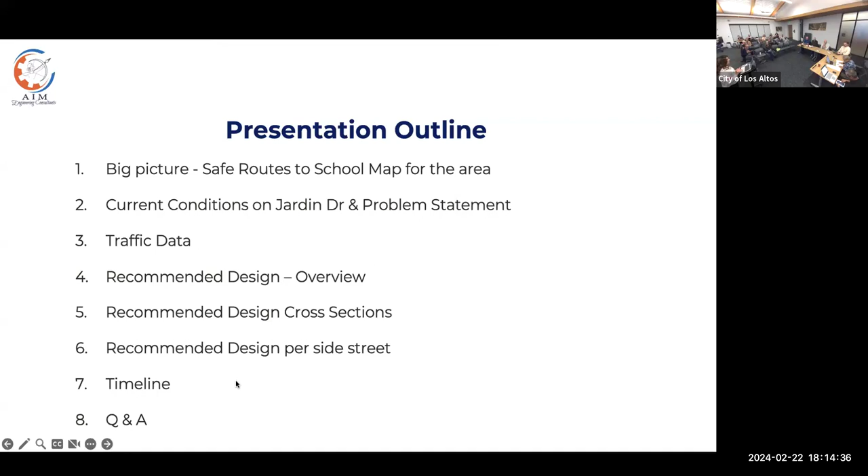Then I would like to go really slow after the high-level overview, where we will look at each side street, starting from one end of Jardin to the other, and look at it in great detail. Lastly, a quick timeline and a question and answer session.

Okay, this is the Safe Routes to School plan for the area. There's a copy of it behind me. It's been on our website. The focus of this slide is to show the recommended routes for connection to the different schools around this area, which includes Santa Rita Elementary School, Egan Junior High, Bullis Charter, Los Altos High School in the middle, and Almond Elementary on the southeastern side. This is an important slide for us to take a minute and look at how Jardin Drive fits into the big picture of the region, as it connects to El Camino Real and the other side streets that lead throughout the city, including North San Antonio, El Monte, and all the other collector streets in the region.

With that, I'd like to mention that the implementation of the Safe Routes to School plans is one of the City Council's highest priorities. The reason it's such a high priority is that the recommended Safe Routes to School path goal is to make it easier and safer for pedestrians, students, and families to navigate the city streets and safely move around and make it to their destination, ideally by foot or bicycle, and third by vehicle, and later on as the city grows, through the use of transit and other modes of transportation. Staff understands this is the number one priority for City Council.

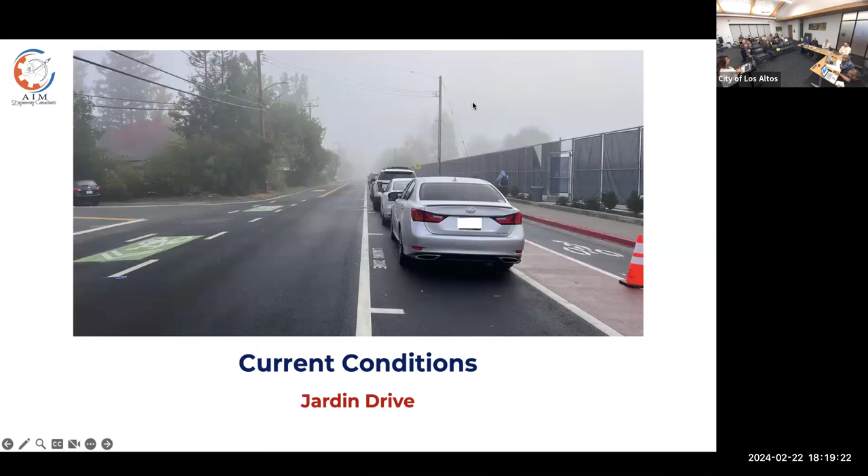This is our current condition on Jardin Drive. We're all aware of it. This is what has brought feedback from the community, from the students, from the high school, from the police department as well, in terms of what they're seeing regarding pedestrian and vehicle behavior and navigation of this corridor.

Simply put, our problem statement is that the current street configuration of Jardin Drive has created the following problems, at least that we've verified. We have reports of it, and we've heard from the community in the previous meeting.

What we're seeing right now with the current condition is unsafe pedestrian behavior, with gaps in the sidewalk infrastructure or facilities. Part of the street has a sidewalk, part of it is unmarked. The residents and students, upon arrival or departure, are navigating kind of freestyle, and their unsafe behaviors are putting them at risk with vehicles and bicyclists. It's not just the students we notice having unsafe behaviors.

Because the facilities aren't built out and the edge line on the north side of Jardin basically just ends where the pavement ends, pedestrians have no choice, if they want to be on that side, but to get onto the pavement, which is a travel lane, until they reach a point where they can connect. So there's a sidewalk gap and a connection gap, resulting in the unsafe pedestrian behavior we're currently seeing.

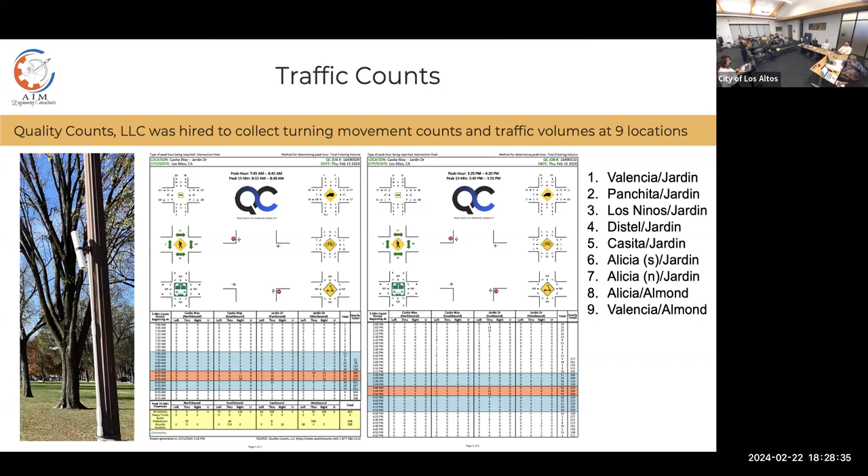We don't have the time and resources to immediately implement that to all those blue segments you saw on our region map. So with that, I will move on to the recommended design. This is very high level, I will go into small sections one by one.

So with this, we hope to get PD's enforcement a little bit more, because now it'll have the proper signage. So that's one add-on you'll see.

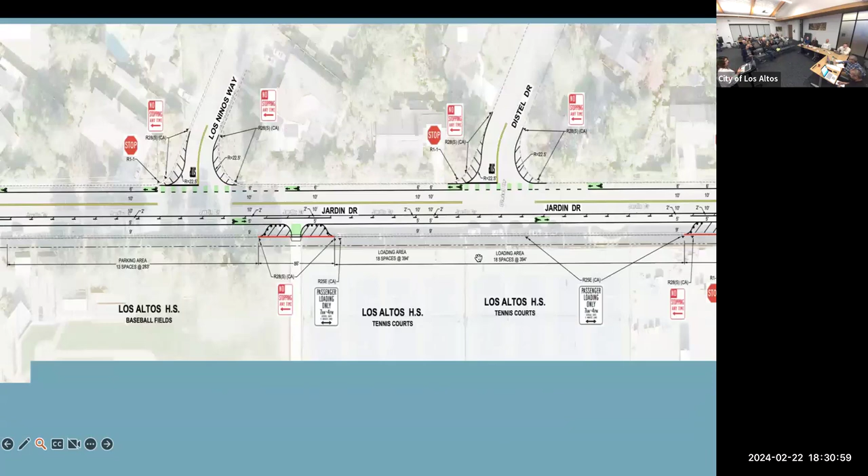One major change or new operational addition you haven't seen so far is a turning restriction on Casita during the morning and afternoon drop-offs. What we were seeing is a lot of pedestrian and bicyclist conflict with vehicles here. A lot of vehicles are leaving Casita and making a turn, and there were so many near hit misses in the videos we watched - we almost couldn't watch it, it was so uncomfortable, such close calls.

I wanted to later share a personal story about cases where it's not near hit misses - what's happened near schools at other agencies and how it was handled. I'd like for us to be aware that if we don't restrict turning movements in this direction, we have a lot of data of near hit misses. It won't just be data, it may actually happen. So that was the overall summary.

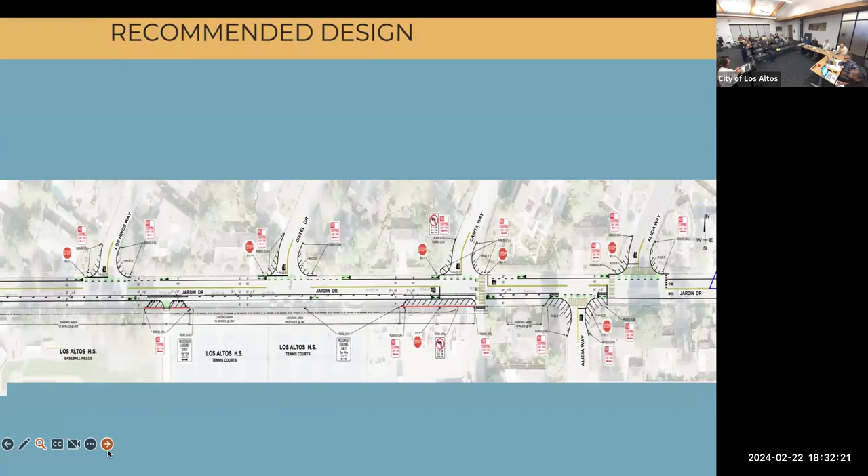Overall, the street section I think is as such: the sidewalk is remaining. The parking we proposed last time to be a 7-foot parking or loading zone, we've added another 2 feet to accommodate the door swing and any movement from the driver. So the parking zone is now 9 feet wide, a 5-foot bike lane, followed by a 2-foot buffer, the same typical 10-foot travel lane. We've made the north side bike lane a 6-foot bike lane, a foot bigger than the standard minimum of 5 foot.

We believe the north side needs the space, and there is a lot of activity on the north side from what we see, and there is currently no sidewalk. So having the bike lane as a 6-foot bike lane is the proposed recommendation.

This section you haven't seen before - at the 2 points where students are entering the school, we wanted to limit parking before and after that entrance point. That way a cyclist, a student on a bike in the bike lane, could make that turn onto the campus without having to compete with vehicles parking in front of them or behind them by at least 20 feet.

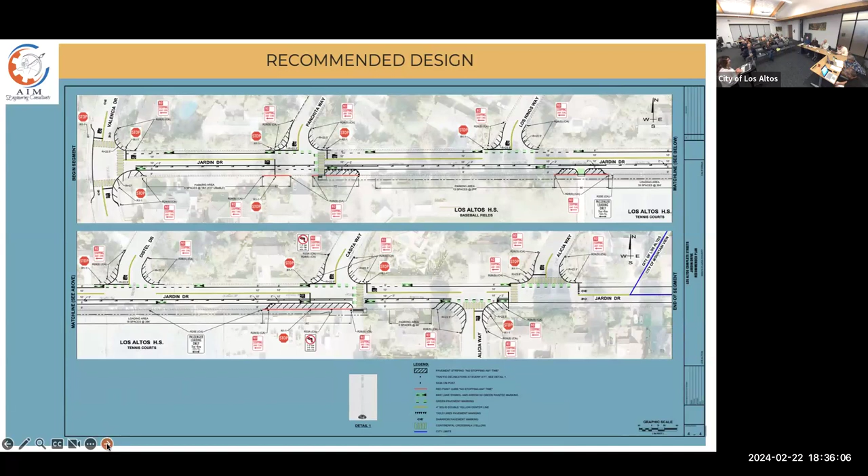Okay, so I will now break down this overall plan by going through Valencia and Panchita first, and I'll continue that for all of the streets till we get to Alicia. I hope you could see this.

So on Valencia, we had discussed hatching over here for a space for the pedestrians when they cross. We went out and basically it's simple line work right now, and that does the job, so we don't need to add more hatching here. We did hear from the residents here that they would rather have less striping in this area, so this was one that we could reduce the striping, and we did. And the ladder crosswalk, high visibility crosswalk, has been brought up before.

I do want to make a point that the distance from this intersection, this crosswalk, to the opening of the school's property, which is a baseball field and an access point to the school, falls within the distance that requires all crosswalks to be yellow high visibility crosswalks.

Thank you, appreciate it. The distance to the baseball field, regardless, even past the baseball field, it falls within any of the access points to the school.

As a city, and throughout town, and in all safe routes to school plans, high visibility crosswalks are a safety addition to make it safer for people to be seen as they're walking and crossing the street, especially in a city that is not very well lit. It's an important improvement to make as much as possible, even beyond safe routes to school paths. Even other white crosswalks should be ladder and high visibility.

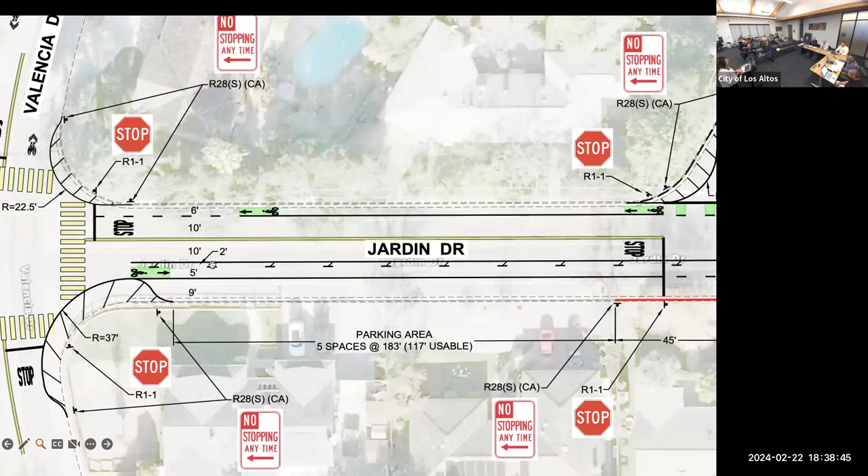The little bulb outs are already there, so we're just showing the hatching. The homes here, the parking remains, so there's about 5 parking spaces in this segment. And the change you'll see is a 9-foot parking lane, 5-foot bike lane, 2-foot buffer, 2 10-foot lanes, and a 6-foot bike lane on the north side. This section remains the entire stint, from Valencia to Alicia. The street section and striping doesn't change.

We hope that having a consistent design like this will be predictable, easy to understand, and there's not too many changes for the users.

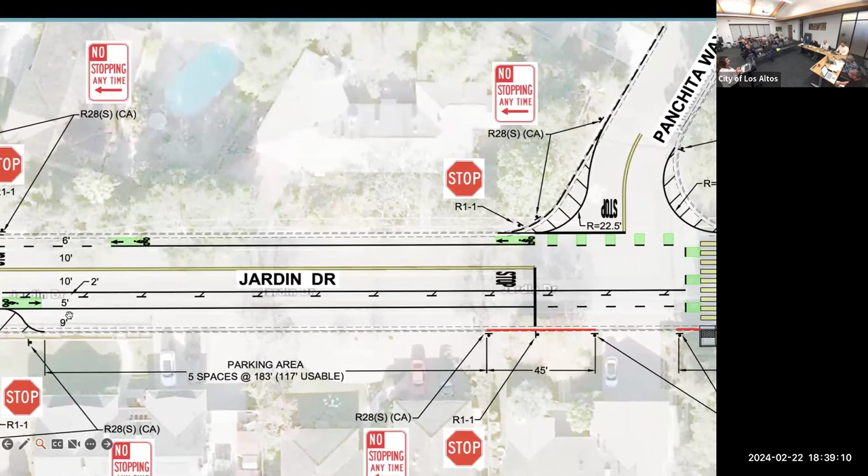Something new I want to point out here is that this stop control at Panchita used to be a one-way stop out of Panchita, and then these were added in a previous project. Panchita, as you guys saw on the main citywide safe routes to school map, is one of the main corridors, as well as a casita into Jardin. So there's probably a reason when this got installed it lines up to this ramp, and this crosswalk was added.

However, the stop, it's hard to see in the videos we saw, there's a lot of running the stops at this location. We looked at it further, studied the videos, went out to the field, and what's happening is that the stop sign itself is pretty far from the stop.

The neighborhood might know there's a stop here and they come to a stop, but what we're seeing is a mix. Some people were stopping, some were realizing it a little later. The only way to make this stop visible is by limiting parking, so it just has to become visible. We cannot move the stop into the street, it's an obstruction, and it introduces other safety concerns.

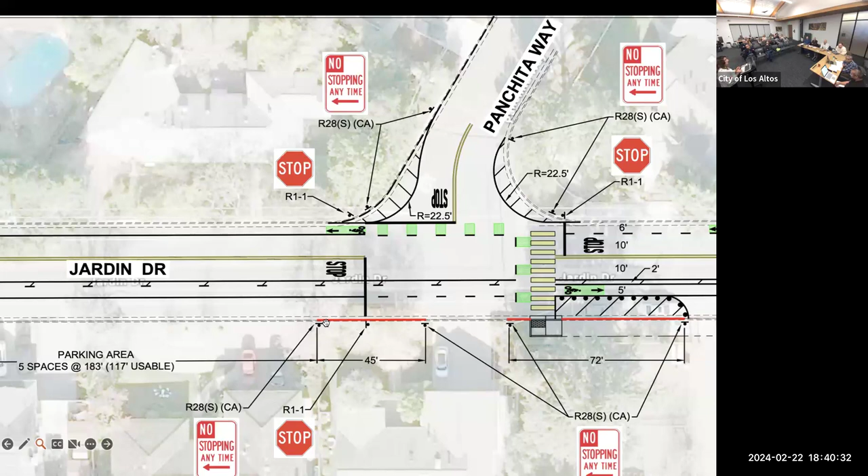At this point, about 20 feet to the right and left of this stop is a red curb being introduced. The ramp on Panchita is now being lined up better with the crosswalk, and the ramp here is getting improved so that pedestrians could hop on and get onto the sidewalk.

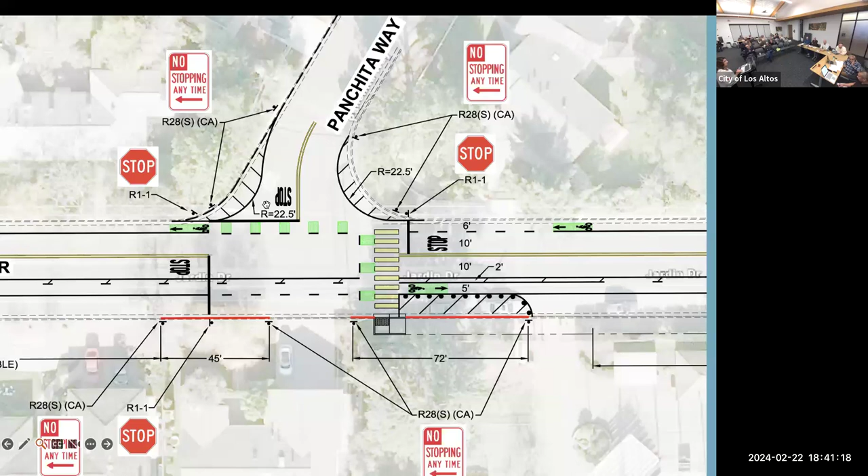Another feature that's new here, seeing the behavior has helped us understand what drivers, pedestrians, and bicyclists are doing. Since this is our parking area, we wanted vehicles to align themselves to the travel lane and not swerve in with the pedestrians and bicyclists trying to get a parking spot. If a vehicle is making a left turn, they have to align themselves and pass this zone before moving into parking. By then, the pedestrians would have crossed, and the bicyclists are watching out and aware of a vehicle moving in.

While I didn't show this here, the school is open and flexible and will continue opening the back gate on the baseball field. The high school vice principal mentioned that custodians open this gate at 6 a.m. and close it when they leave, so it is open and available for pedestrians and even bicyclists to enter.

This is available at least for the next couple of years. Long term, we didn't show a permanent ramp or driveway because the high school will take care of that as this is an access path. If it turns out this is a popular route, it could always stay open. So this design accommodates today's use and potential future needs.

The high school is looking into the plans for this driveway. Since we don't know about it, we didn't over-design this one, knowing the tennis courts are more popular and the east driveway is more popular.

Here we wanted to focus on getting drivers to line up to the travel lane when they make this turn. Luckily it's a controlled intersection, so you should go in order, and there's less conflict as we'll see as we move up Jardin.

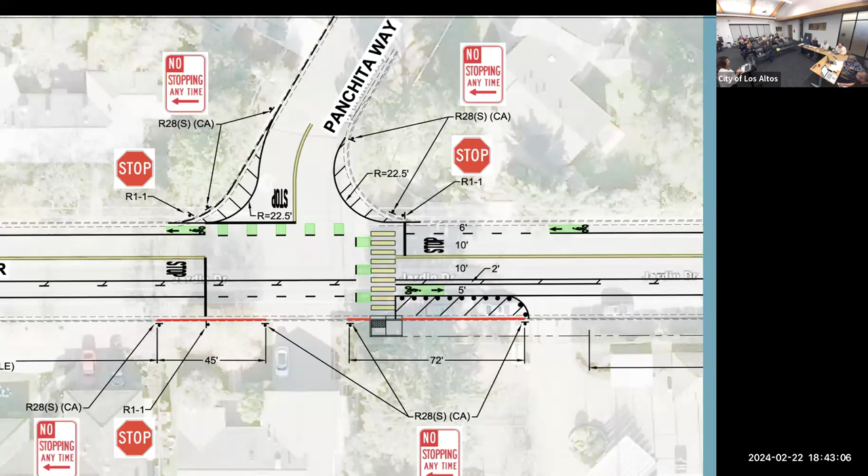On Panchita, again, just the no stopping anytime signs on the corners, red curb to make the stop sign more visible, and blocking vehicle parking up to this baseball field, with some bollards to really discourage vehicles from stopping here. It's pretty much make your turn, keep going - they have a better angle and better visibility looking straight down, and they're not in as much conflict as if they were allowed to park here. They may just swerve in and make this a drop-off zone, so the delineators are to really help drivers not try to illegally park and drop off.

This is - I'm sorry, let me go back. Okay, so that was Valencia to Panchita.

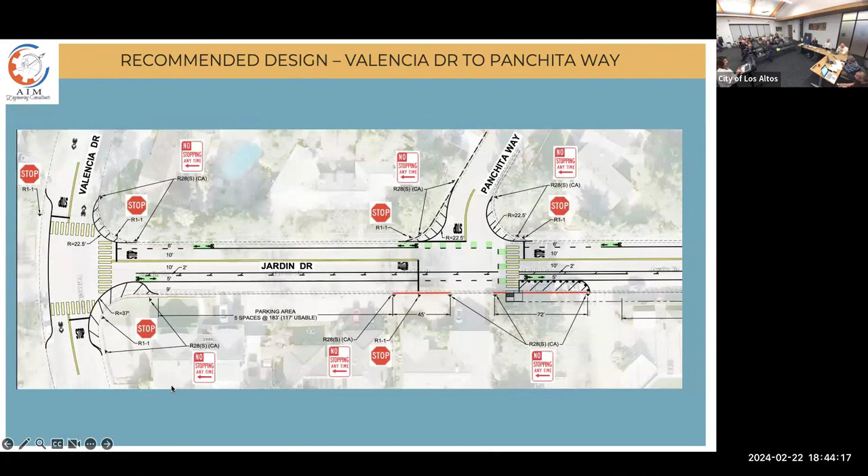Parking is available on this side of Jardin, and parking is available behind the baseball field. So now we're moving on to Panchita to Los Niños - basically that, did I say tennis court? Okay, I meant baseball.

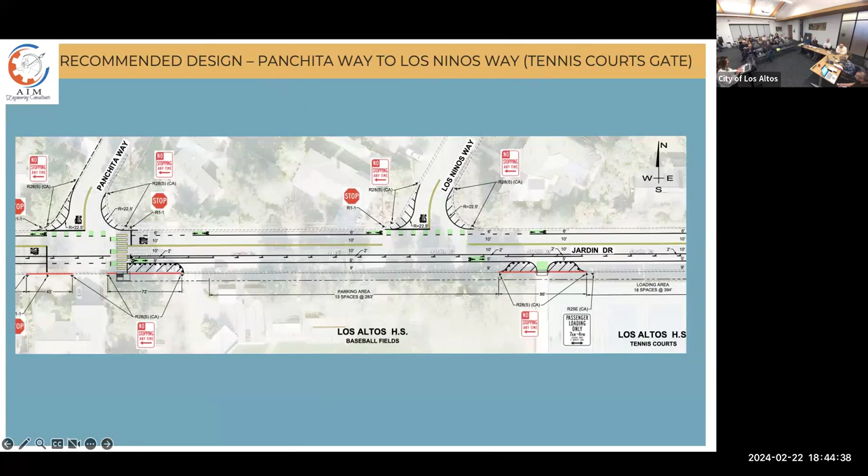Here, again, I'm showing that snippet from Panchita. In this section, as we mentioned, there's 9-foot parking, bike lane, a little buffer, 2 travel lanes, and a 6-foot bike lane on the north side. Parking is allowed here - we counted roughly, depending on whether we use the tick marks or let it be unmarked, how people park, maybe about 13 parking spots here. And I think we saw about plus or minus 8 or 9 off of Valencia.

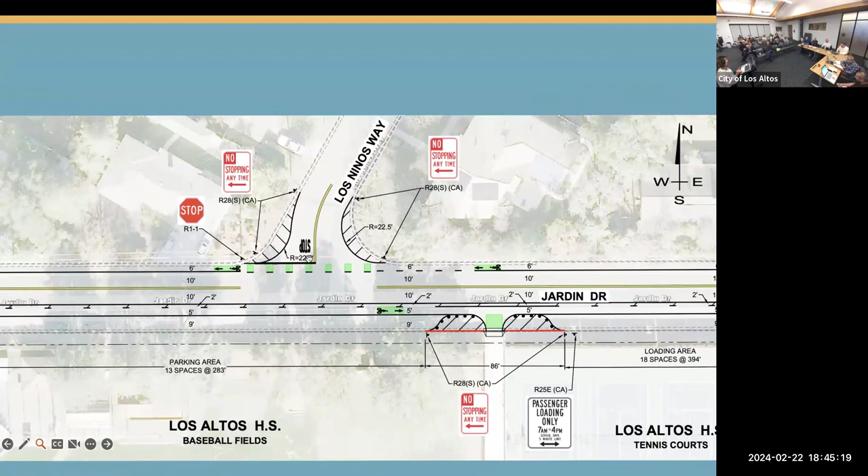At Los Niños, just the no stopping turns - we've talked about the center line of the side streets being scooched closer to the center, to the intersection, giving the driver better visibility to the right and left.

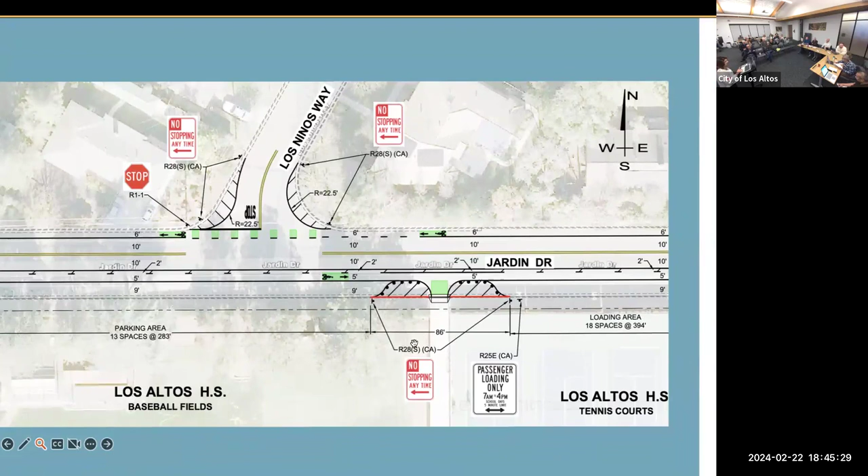Here is the tennis court entrance, and this basically marks where parking stops and the loading zone is available. We as staff went back and forth on this so many times with the high school, looking at the videos and looking at our traffic counts.

Just functionally, we've been out there, we're just seeing, well, what do people do? How are they using this area on the weekends? How does the evening hours look like?

Removing parking altogether on the street is going to create a lot of problems for the side street. It will also create more unsafe driver behavior if they have nowhere to stop to drop off.

So for that reason, we thought what would be the easiest way to enforce, for enforcement wise, and kind of just keeping a simplified understanding east and west.

We also looked at where are the kids coming from and where are they going from. Is the tennis courts more popular? Is the baseball field going to be more popular? We know based on traffic volumes that the east entrance is definitely the most popular. That's how the facility is set up. So that explains why the numbers are higher on the east driveway.

However, we've heard from the school that the impacts on Almond, even though they have opened the horseshoe and there's traffic, there's ability for parents to drive in, drop off, and leave, they cannot only accommodate drop-offs in the front because of the queuing that's getting built up. So breaking the drop-off ability to the front and the back of the school with multiple access points is what we believe is the best way.

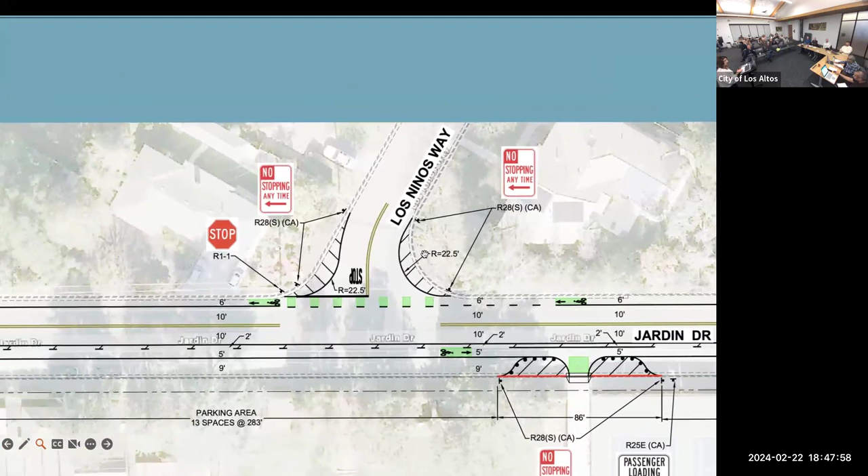I'll get to that section, but we made the loading zone past the tennis courts and before the tennis courts, parking only. And so the same idea exists here.

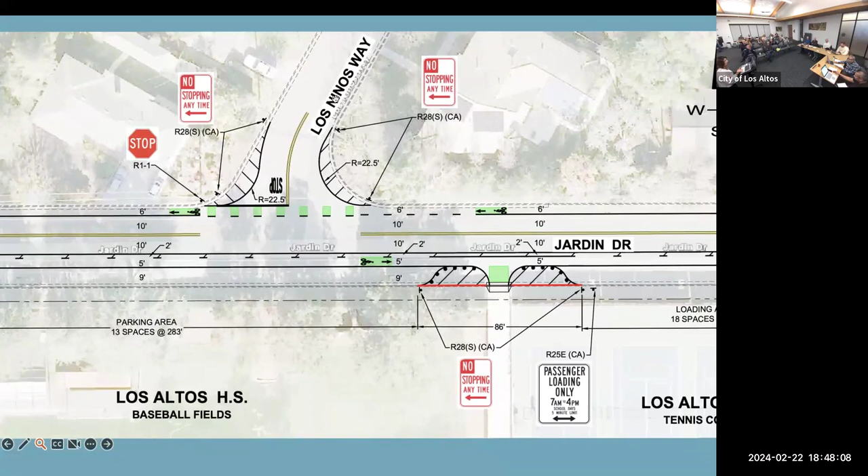So if a driver is leaving Los Niños, we would love for them to turn right and just kind of move out of the way, but most likely they'll want to turn, so they are turning to get into this travel lane. The visibility, by pushing them closer to the intersection, they could see better, they could make a better decision.

The green boxes in the front identify that a cyclist might be passing through, for them to be aware of that. If they are a parent or a student driving, they know the traffic situation on Jardin. So hopefully they are making a better decision in how they make the turn, finding the proper gap.

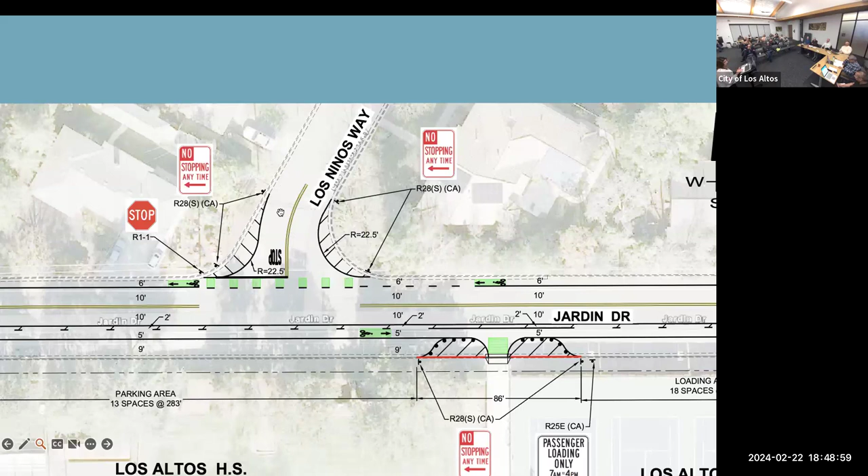When they make this turn, again, we're hoping parents from Los Niños, whether they get a few spots here to park, or students, otherwise it's just loading only.

They're passing, there's no incentive for them to try to swerve here, because we'll put delineators, and they're forced to pass this tennis court entrance and pull in here to load and unload.

With the school support, we hope to get the student cyclists in here so that they're not in conflict as much with the loading area.

This is what we've spent a great amount of time talking about. Can this be staffed? Is this realistic? What else can we do? Should we? So some of the suggestions are, yes, we want to remove the post that's there. We want to look at the gate. We want to build a better driveway, so it's actually encouraged the same way that the East driveway is being encouraged as an access point to the school.

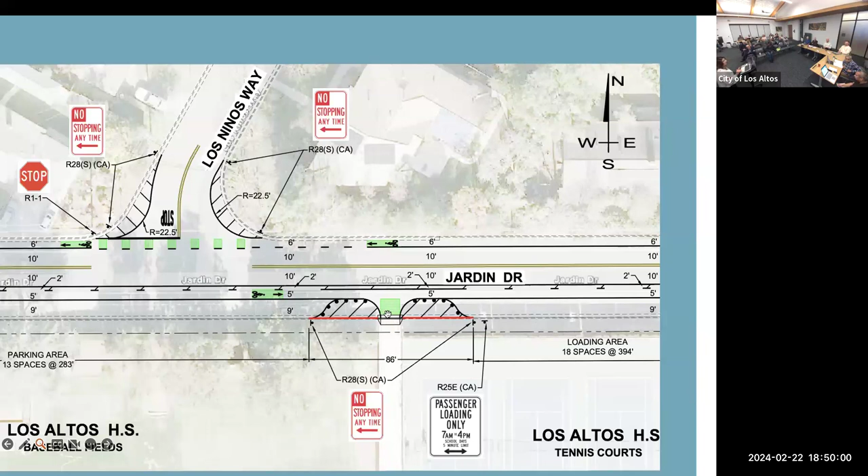If we get support and kind of educate the students, when the students are coming, we'd like to collect them off of the tennis courts on their bikes and on foot if needed. Otherwise, there's a sidewalk, which is safe. So this covers up to Los Niños to the tennis court.

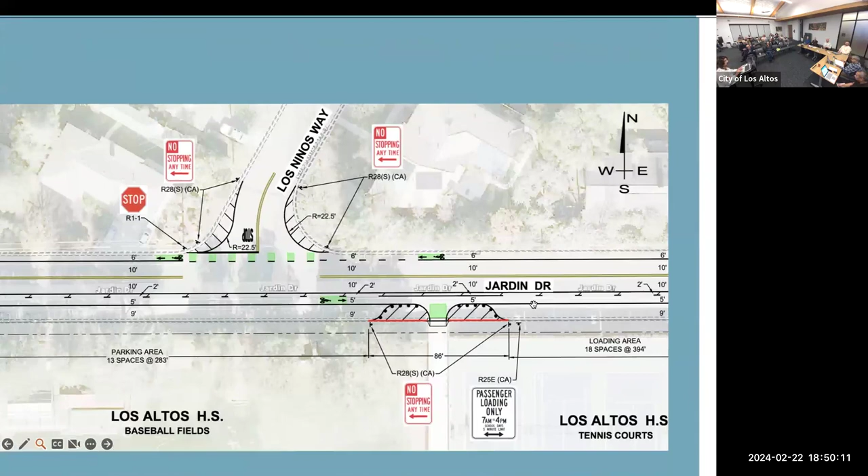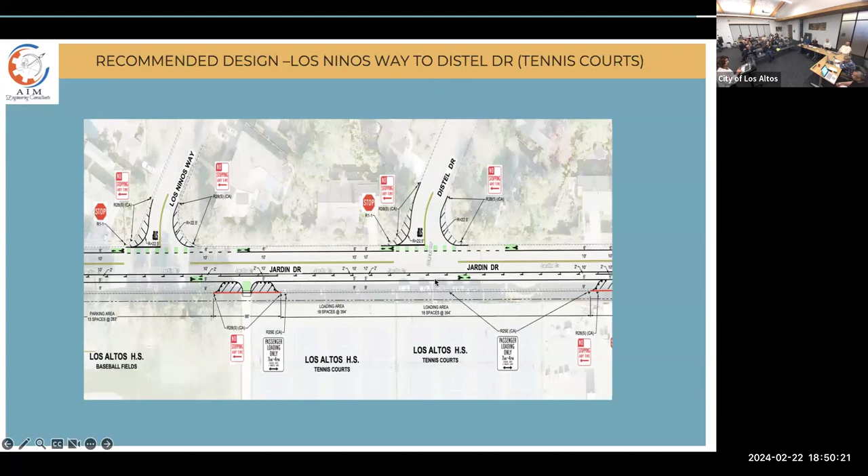This is from Los Niños to Distel, the tennis, but basically behind what's happening at the tennis courts. It's just the loading zone, pretty much. Bikes are entering through the tennis court gate and the rest is just loading.

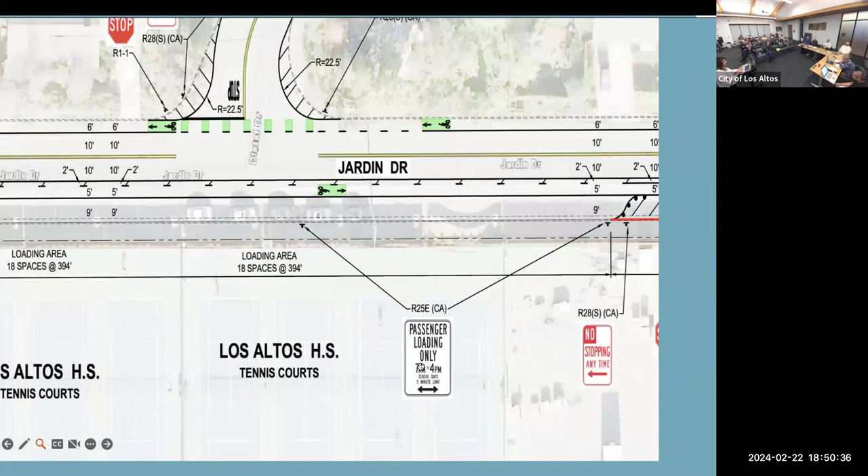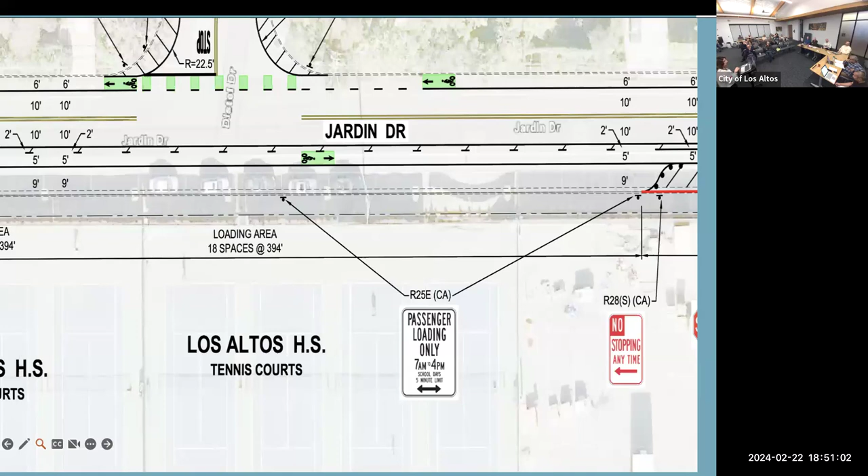Now, the hours I do want to mention is it will remain a loading zone pretty much the whole business hours for school, which is 7 to 4 p.m. Loading only, 5-minute limit. This is a standard California sign, even the 5 minutes is a standard California sign, school day. So this is used across the state to allow people to drop off, as it is a loading zone, and they kind of safely take off when they've completed their drop off.

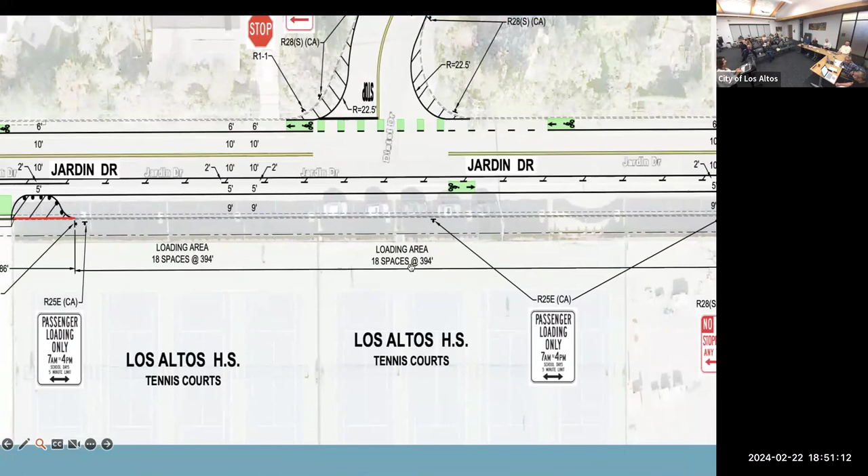And this loading area is about 18 spots. And at Distel, same thing.

Just the buffer area is now going to get the no stopping signs. The center line is moved up, the green bike lanes, 6-foot bike lanes. I see some duplicate text here. We were working around the clock to get this prepared.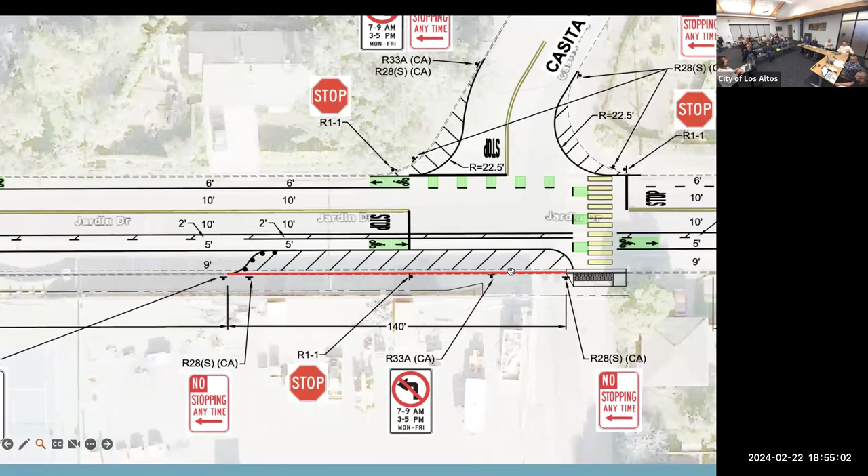This extended hatch, red curb, no stopping, is to limit vehicles from moving into the spot and trying to take - we're protecting this intersection with the red curbs here, no turns here, so the movement onto Jardin from Casita is less, and vehicles are loading and lining themselves up, safely maneuvering and lining up in this 10-foot lane to continue their travels.

This driveway is going to be better lined up with the crosswalk. The bicycle green striping will be better lined up on the school property. The school, I think, is planning some improvements on this alleyway, but for this project we just want to make sure the bikes can actually get onto the ramp and it's not at the edge where bicyclists are moving into the crosswalk, because the ramp, the driveway, is not currently lined up very well.

So there's a driveway correction here. In front of the house, to the right of the east driveway, the 9-foot parking is there. We hope that by restricting left turns, parents won't be making this turn to park here for the kids to get dropped off and drive off. The kids get dropped off, but they're using this as a loading zone.

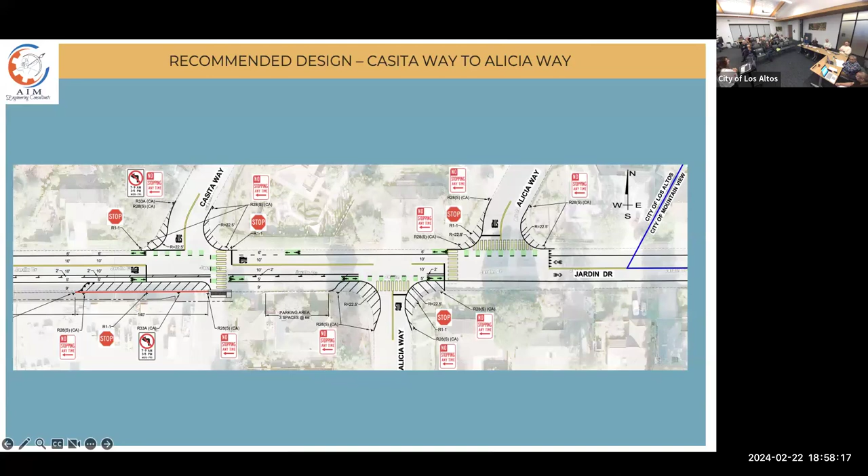It just ends with Mountain View with Sharrows, and we also provided, as I mentioned, Sharrows on the Alicia side to connect and show what happens to the bike lanes after this segment of Jardin is complete. So it would transition to Sharrows until we work with Mountain View on their ideas and what we should do. We've reached out to them to talk about Jardin Drive, so hopefully we'll get feedback from them soon.

This is a timeline we've looked at before. It's almost the same thing, just a couple more meetings that have taken place, with the goal of getting something improved from what it is right now by August when the kids are back to school. However this journey takes us, it would be great that by next school year we have a safer condition out there, if not sooner.

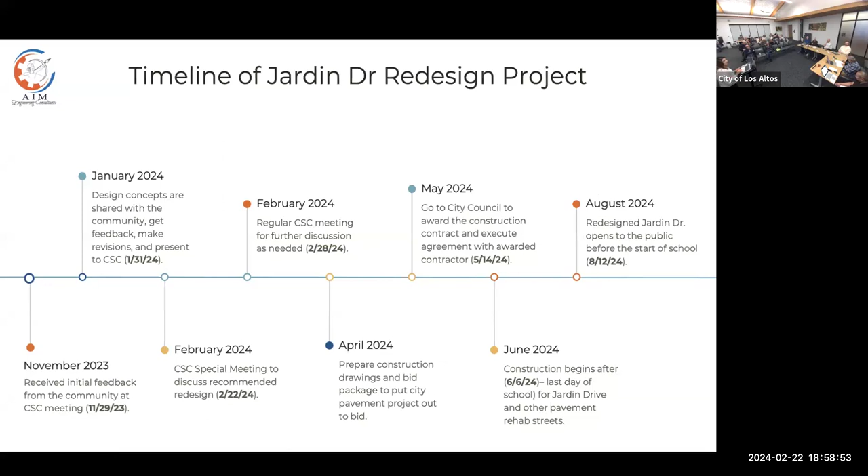That was all that I had so far. I'm sure there'll be some amazing questions, but thank you for your time and listening to this recommended plan for Jardin Drive.

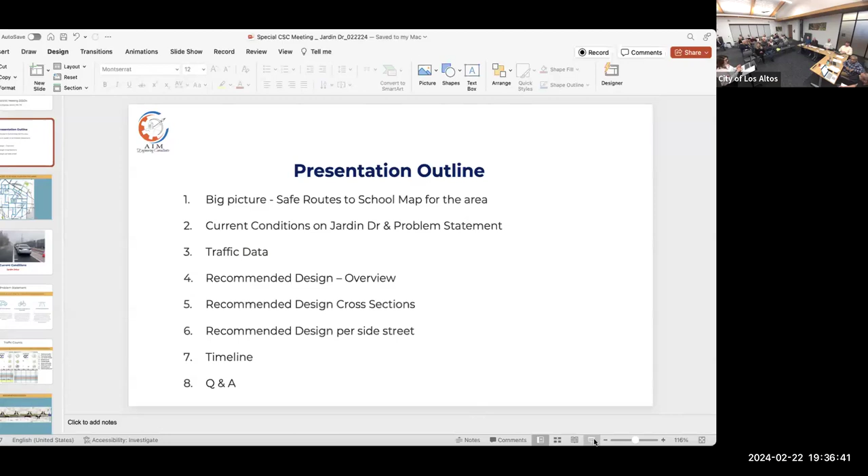Go back to the drop off and loading zone, which is on the Casita side. And is there a way that you can make that a little bigger, there we go.

So if you look at the loading zone, that's 9 feet wide, as I understand it. And then you've got the 5-foot bike lane, even though it's 6 feet, it looks like there's 5 feet that's operable, with bikes going from left to right, going east. So my question is, when a car pulls into that loading zone and pulls along the curb, how much room is there between the left side of the car and where the bikes are traveling? Is it 2 feet? Is it 3 feet? What's that space?

Great question. In our previous design, we went with the bare minimum, which was 7 feet. So right now with the extended 2 feet, it's now 2 more extra feet for the vehicle, basically for the door and getting themselves aligned to park near the curb. From the 9 foot, this black stripe right here, and the 5 feet that's designed for the cyclist to travel, it's basically where the cyclist feels comfortable. If they're using the middle of the 5 feet, it would be like the 2.5 mark. So it'll be 9 plus another 2 feet.

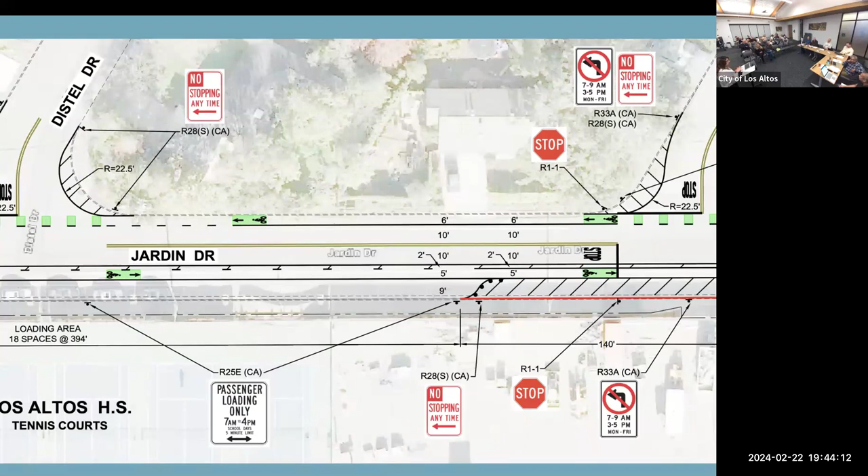And if there are cars parked on Casita, is there room to drop kids off? I guess they would have to pull in where there isn't a car, right? Right. So we're not designing each of the minor streets or going over how parents are going to drop off their children.

So someone mentioned the street is so narrow. How are we fitting parents dropping off, the actual parking, and the given travel lane - there's not enough room. So what someone mentioned, there's people waiting and swerving and watching someone coming towards them to accommodate them. All of that's true. In a narrow street, like all of these minor streets that we're seeing here, that is the given.

In fact, we actually pulled up maps, and most of the property lines are within the city's right of way. So if we wanted to dig deep and move lines, we would have to take property lines to where it really is. But I know we're not going there, so these lines drawn on these drawings are not true property lines.

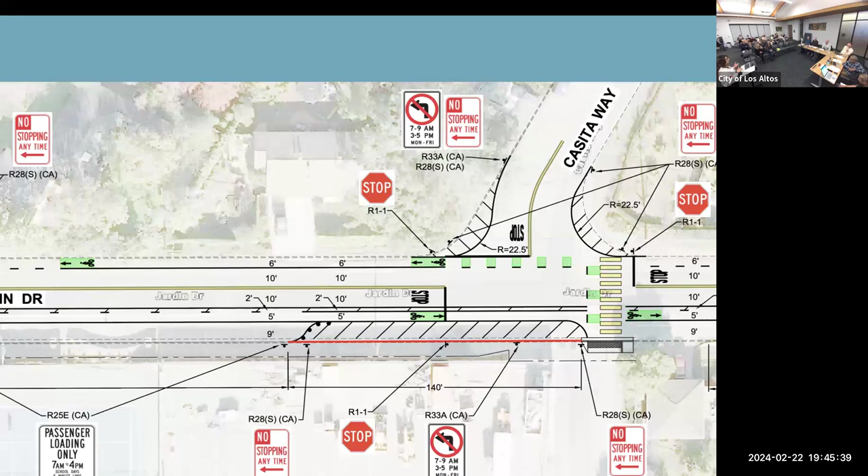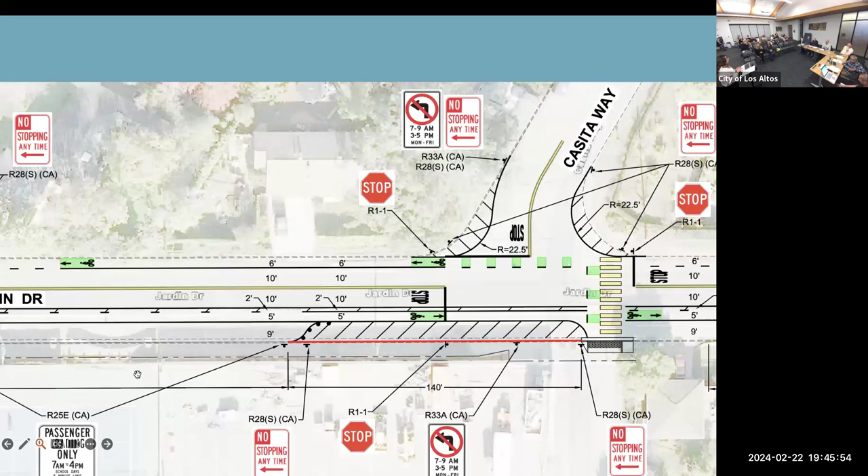The street - like a high school teacher made a comment last time - is so much wider than what you guys are showing in the section. Yes, that's true, but in this exercise we're not redrawing people's property lines and taking away land to create a wider street with more accommodation. Given what we have, Casita drivers ideally would allow students to get to this first crosswalk, which is designed for them with this entrance. If they must drive, they have no choice but to find a place to safely make a U-turn and come back to the loading zone.

And I think I have another staff member - based on the data that we saw. Okay, can you pick up the voice? Yeah, can you?

So I think we can safely say that based on the data we got, most students are being dropped off on Casita. So the cars, when they're making a left turn, they're basically leaving, going back home. There are so many students just crossing at Casita. So I think if we make people go right, they might have to go around to get home. So anyone making a left turn, versus anyone making a right turn, is not going to drop a student off there - very few people.

Thank you. Other questions? No. Not right now.

So, a couple of questions on the cross section that you had up there.

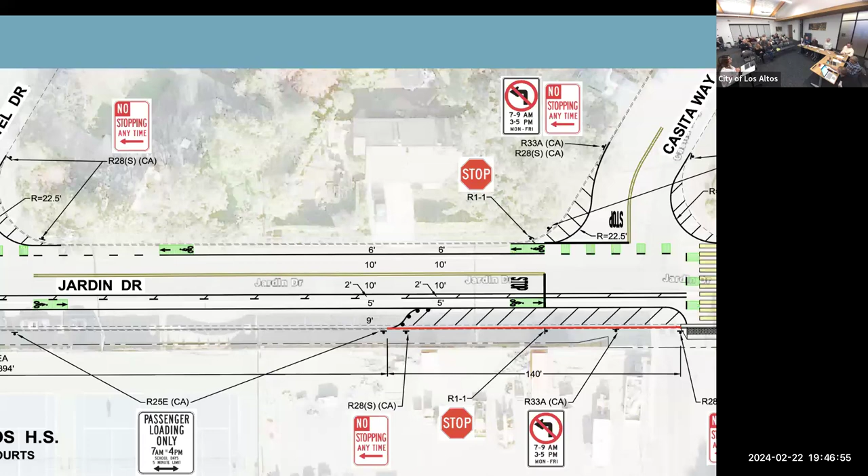So you've got on the left side you have a 6 foot, and then you've got the 9 foot, correct?

Yes. Okay, so when you download the PDFs that's on the website today for today's meeting, those are 5 foot and 10 foot. So there's a difference there that should be corrected, because it doesn't match your presentation. Right, we made that change after the uploaded version, when we noticed that the 5 foot in the buffer, the shoulder on the north side needed that extra foot. So we thought 10 foot of a parking lane was...

Saying that there's a difference. There's a discrepancy, yes. The information is not on the website, so there's no way for us to tell which is the correct one. Okay, what's on the website I would assume is correct, but it's not. You're right, no, that was correct as of then, when we uploaded. That was the plan, a 10 foot parking lane and a 5 foot bike lane on the north side.

Yes, so that'll be there. Yes.

So on this Quality Counts company, you said you put up 9 cameras. Are those gonna stay there permanently, or for how much longer?

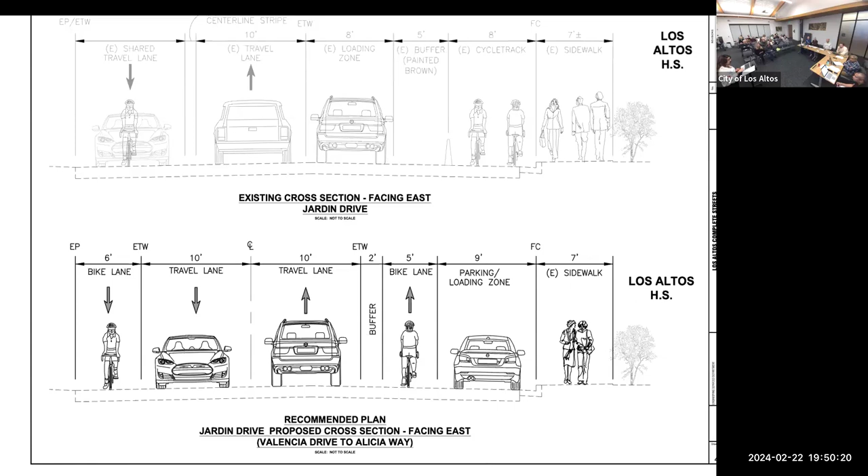For the loading zone, no part, I think it was the parking, yeah, passenger loading only.

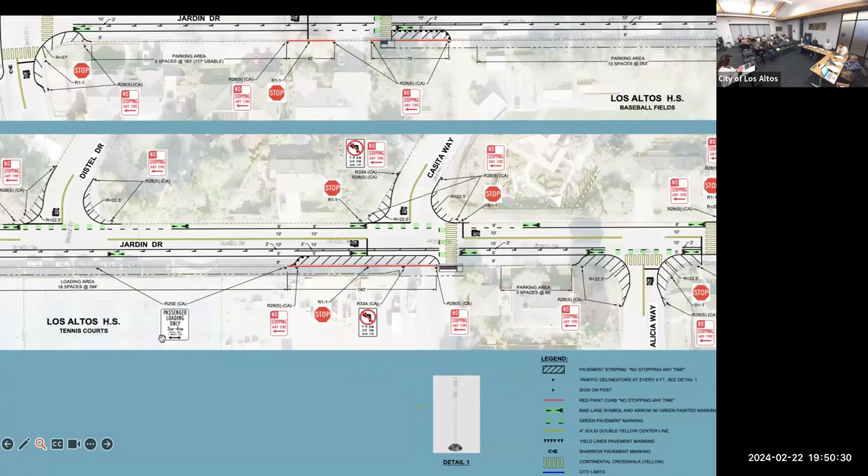So we have a no stopping anytime. To me that implies that's also on the weekend, and you're not gonna have people there going to school so much during the weekend, but people are gonna be using those spots for tennis or whatever else. So I would think those signs should actually say weekdays.

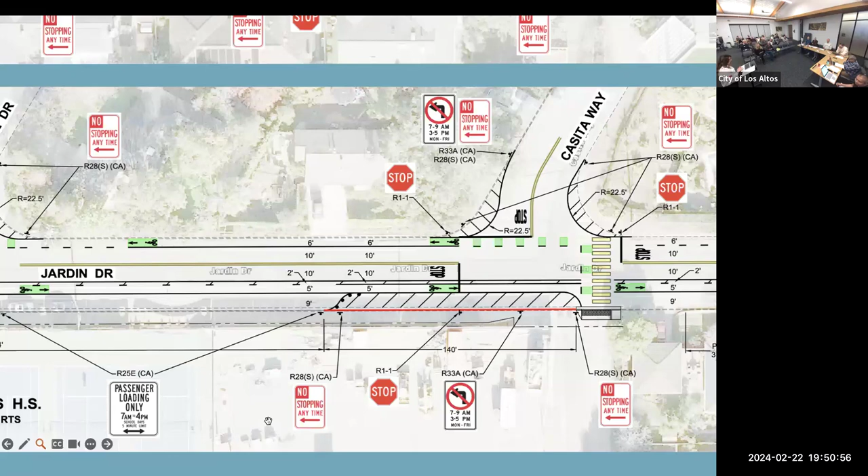So to your point, yes. I first wanted to point out, in case anyone was confused about these arrows on the no stopping anytime sign, this is a standard sign, but when we order these, at the time of ordering you designate the arrow to go right or left. So this red would have one arrow pointing one direction. I just wanted to mention that so no one thinks we're saying no parking, when we're also saying it's a loading zone.

So here we said school days, and you would like that to say weekdays instead of school days? No, I'm just saying that when you say no stopping anytime, that implies it's also enforceable on the weekends.

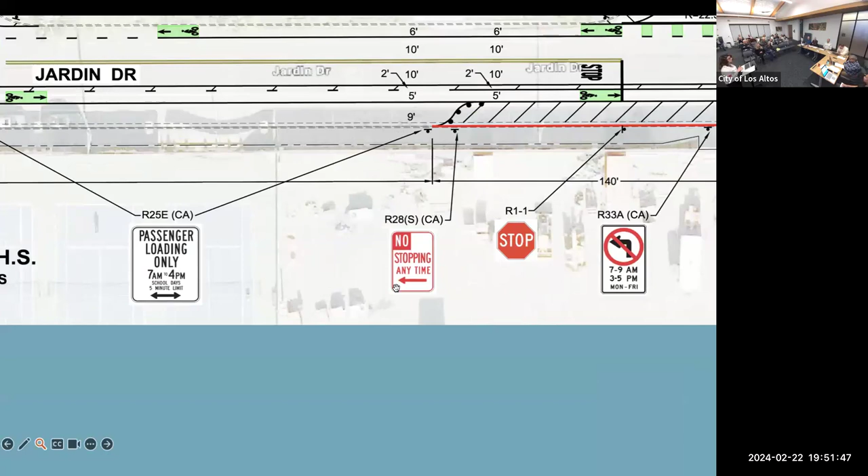Right, that is correct. So where we have no stopping anytime, we do want it to be 24 hours, even on weekends. The reason why, well, this location has to do with operations of cars leaving the parking and lining up to this travel lane. You're not gonna be using that, kids are not gonna be going to school, right, it'll be parking, but there will still be bike lanes that there may be cyclists.

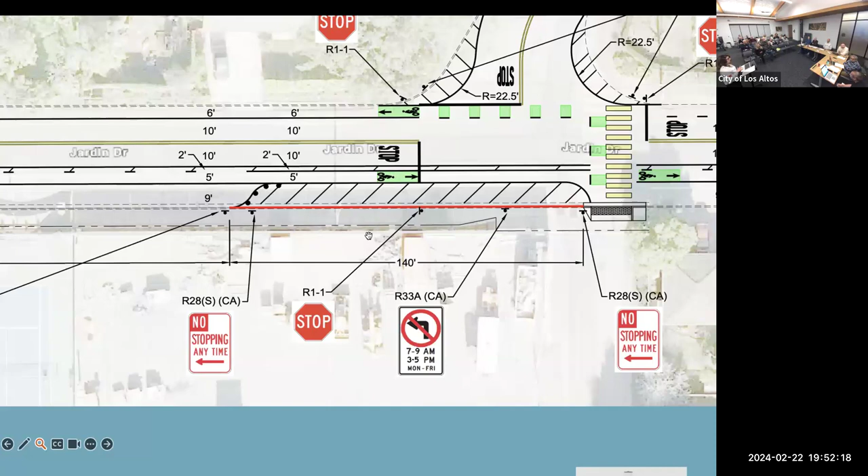Tom, I think it's that red, that's where the no stopping is. Right, it's not the other. But typically that's where people park anyway, right? No, the parking will be during the weekend for tennis courts. Right, people I think will park there.

Right, so this recommended concept does include red zones, and it's mostly to make sure the stop sign is visible. We have this red zone near the very busy intersection of Casita and Jardin. The other time you see red is for this stop here, and we have seen cars completely block the stop, and we have videos of people running through the stop.

Sure, I understand that, so this would be around the clock. I think one of the big priorities should be looking to improve as much parking as you can. And weekend is different than weekdays. The other priority should be looking to increase student parking.

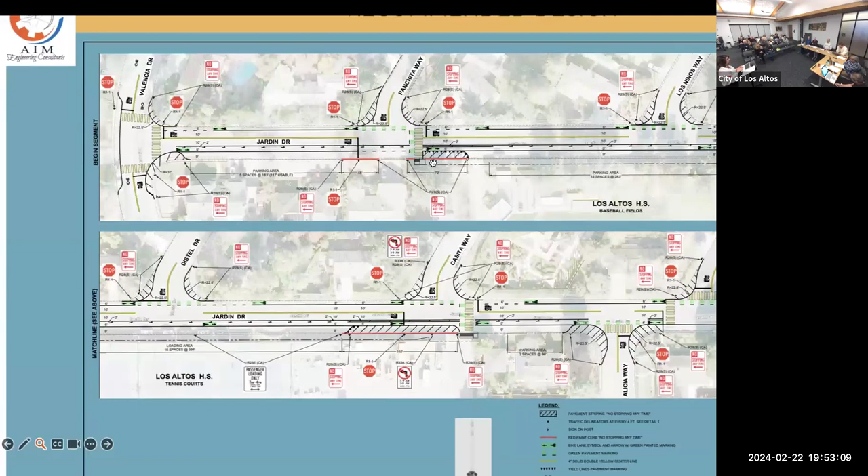Now, can we wait for comments till later? Maybe we'll go to the questions so we can come back for comments. Okay, yeah, any other questions? Yeah, I've got a couple if I can. Yeah, sorry, thanks Tony, I really appreciate everything. Okay, try to keep it to just a couple quick questions.

When I see the improvements or updates that you guys made to the proposal, it looks like many of them came from obviously hearing community input. It appears to me that some also came from the observation and data collection that you guys saw and processed, right? Is that fair to say that some of what we see here today that's different from when we last saw things is in response to or because of the observations you've seen from the data that has been collected since then?

Yeah, great question, because I did want to mention I was saddened when I heard that community members said they felt like they were not being heard, or that they were not being included, or their thoughts and emails are not being reviewed by us. Actually, this project has stopped a lot of other activities in the city. We are reading, reviewing, talking, sharing, tabulating every comment that has come in, from who the person is, where they live, how this is affecting them. And so absolutely, each meeting that we've had up to now, we've been adding to the comments and feedback, which is why we didn't want to go and present 3 more concepts and keep this going.

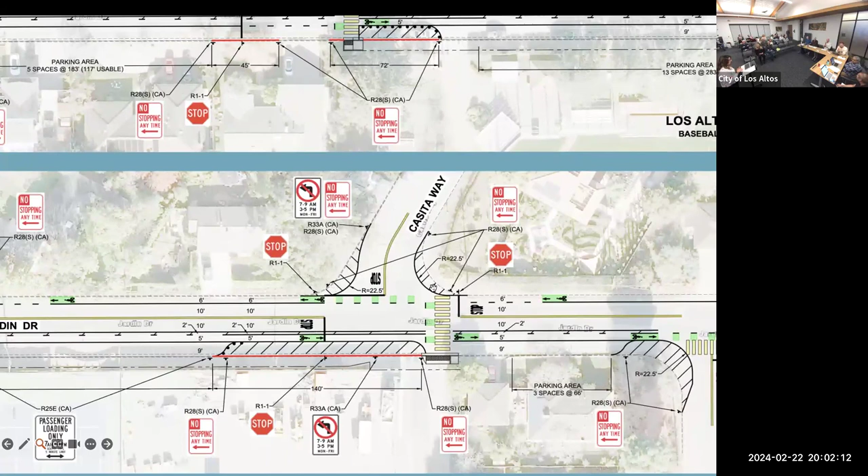And clearly, you talked about driver and pedestrian near misses. Are you looking at pedestrians that are crossing east-west and folks that are drivers going southbound on Casita? And that's part of the reason why we're looking at taking away the left turn there. Is it also folks that are making a left turn and hitting folks crossing the street from north to south? Could you tell me a little more about your sense of that?

Yes, during that window, the 15-minute peak in the morning and afternoon, there's a mix of all uses. Bicyclists, pedestrians, and vehicles are all trying to figure out what to do right here. Students are trying to get through, cyclists are weaving around, not staying within the bike lanes or the green box, but their goal is, they're looking at the driveway and they know where they're trying to get in.

One thing I noticed was even a vehicle driving onto the campus in one of our videos. We checked with the high school and asked why a car just followed a pedestrian, a student, into the school. The school was very surprised, because they've warned the contractors not to enter this driveway when school's in session. They're supposed to arrive before school or when classes are in session. So there's going to be some enforcement, hopefully, from the school to the contractors.

So there were even vehicles cutting right through, inches away from the students. What we're seeing is clusters of students packing the corners on all sides, just zigzagging through. When there's a car at a stop, the kids are just walking.

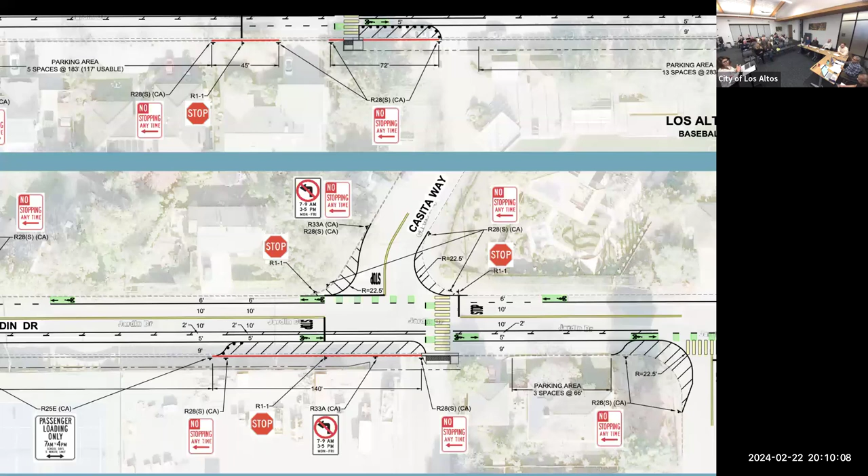As we spoke to the school, we had more discussions, got more videos and revision of the data collected. It was apparent that from 7 to 9—which is still an additional 2 feet, and cars are parking up to the curb—we believe it's safer than the 7 feet. There's enough room for the door swing, and the bike lane is still 5 feet with that additional 2 foot buffer. That extra foot, if we could throw it on the north side, making that 5 foot north side bike lane a 6 foot bike lane, I believe that's the better use of that extra foot.

And on the bike lane striping, I see on the south side there's the 5 feet, and then those hash marks to provide some sort of a buffer. How wide is that? It's 2 foot right here. So in fact the bike lane is kind of like a 7 foot space for them, 5 and 2. The buffer, the tick marks, is basically to indicate that a parked vehicle may lead—it's indicating for the bicyclist that a parked car may come in front of them, versus a solid hatch.

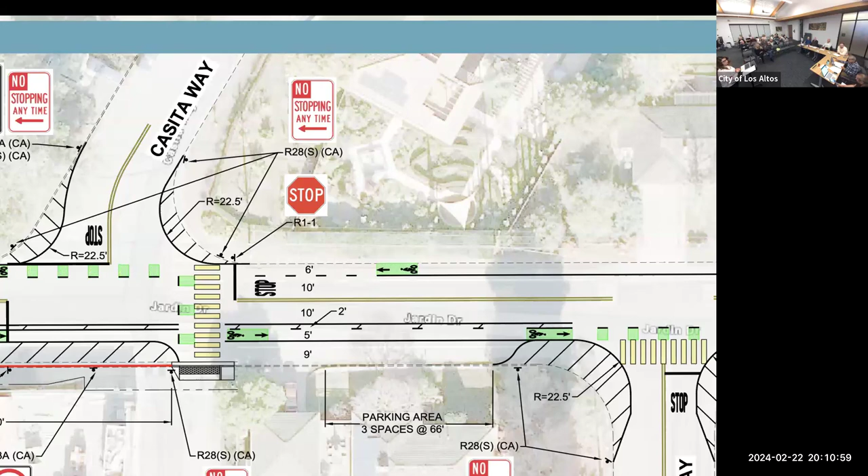I want to give you an opportunity to maybe address some of the concerns about the yellow striping, specifically high visibility striping, and why that's the case.

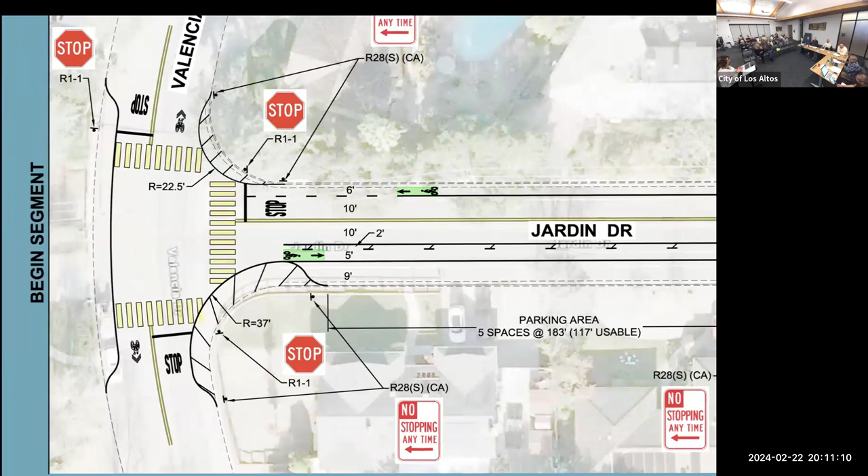The high visibility striping on all of our Safe Routes to School have been established by the Safe Routes to School plans. The city has had all the schools in Los Altos evaluated for Safe Routes to School, and where a crosswalk is recommended, it's always a yellow high visibility crosswalk. We compared what was recommended versus what we have now, and every recommendation matched except one corner, which did not match the proposed plan from the planners who did the citywide Safe Routes to School evaluation.

We have gone to other locations around the city and they're upset that they don't have a yellow ladder crosswalk. They're actually demanding for a crosswalk to be painted yellow, but it's not among our priorities right now. We're trying to figure out which school to work on next.

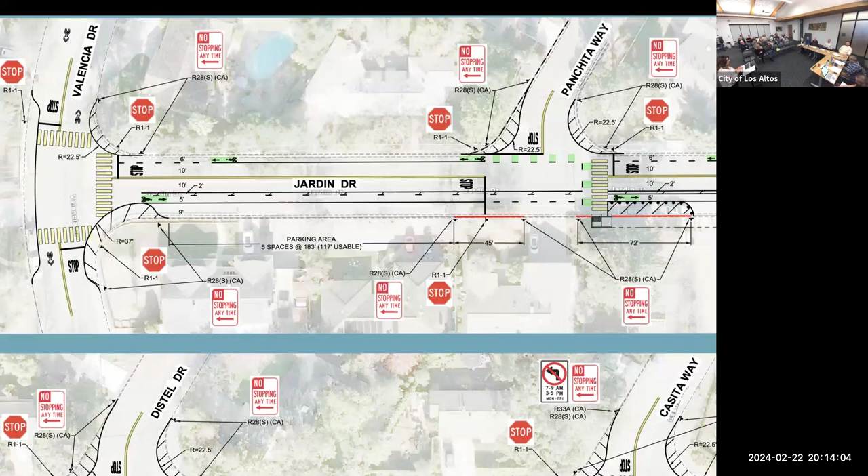There was a question on the data collected, with some saying the data might be insufficient. From your experience, what can you say about data collected on a single day versus multiple days, and how typical was the day the data was collected on, in representing a larger set?

Great question. I think more data is always better, and even with more data it would lead to averages, like if we collected 5 days, an average of what's happening here, here, here. The activities we saw were movements where even if there was a crosswalk, people were going at an angle and not actually getting caught by the data collector, so we had them redo it. More data would just give us more pinpoints, and I think it would of course be a little bit better.

The data we did collect, when we evaluated it and went through it with the Quality Counts supervisor, was very standard for school drop-offs and peak hours. The peak 15-minute window, they said, yep, this pretty much matches what we saw. Peak hour was pretty much standard across the country: this window, everyone shows up because they're dropping off their kids and they go away, and then everyone comes back in the afternoon to pick up.

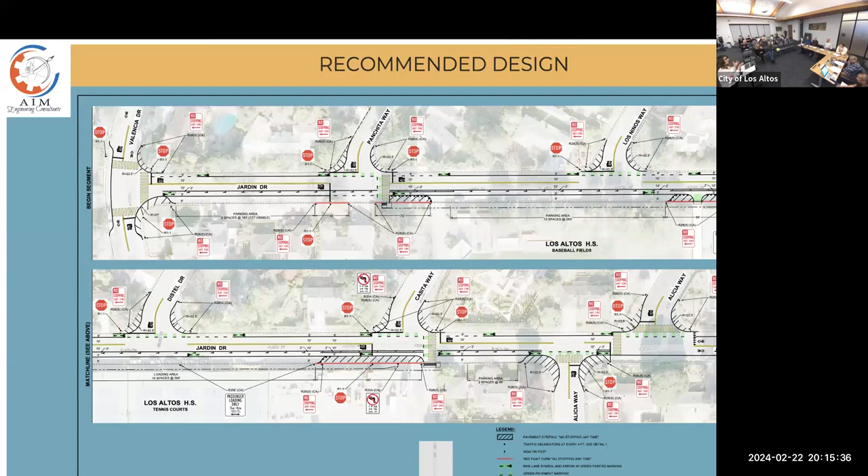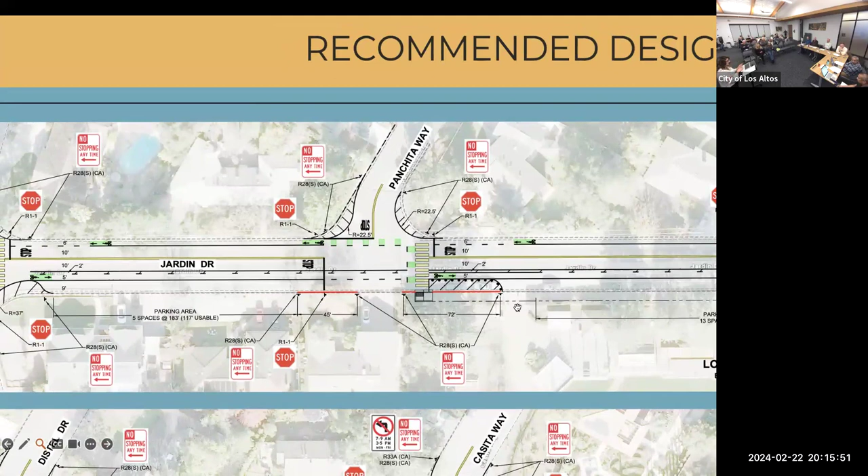We wanted to know which of these side streets is getting the most use, drop-offs or pickups, because we wanted to make sure that, even though this crosswalk is already here, it gets utilized since it's set up so well. We have the 3 stops, a crosswalk, a bike lane, and the access to the baseball field is right here, and the school said they'll keep it open. So I was interested in what's happening here.

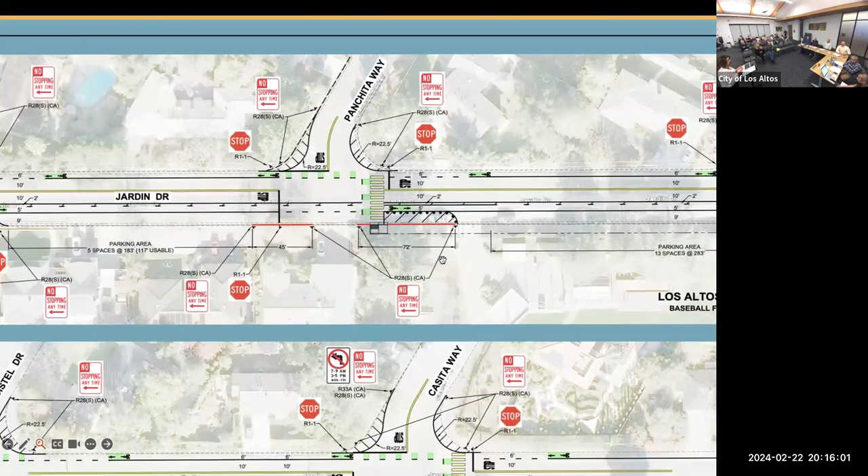It goes without question, we've already seen what was happening at Casita, the numbers showed it. I didn't see so many near hit misses because all of us wear our yellow vest and drivers know someone's out there, so they behave differently. But when the cameras are up, they're doing what was natural, what they would do every other day. And it was interesting to see, when staff was not on site, how people were actually driving.

Was that the main recommendation that came out of the data, restricting the left turn?

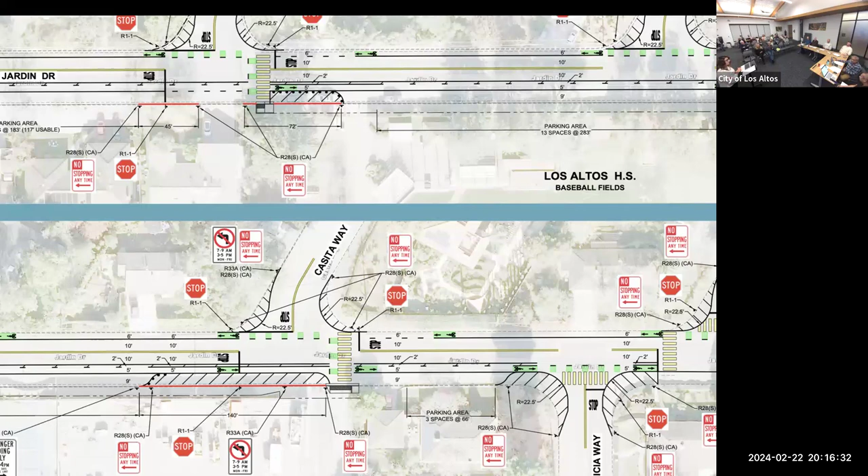This left turn restriction was due to the amount of near-hit misses at this location compared to any other. We also saw a lot of illegal U-turns and parents dropping off in the middle of the lane throughout. There's no shoulder right now, so parents or drivers were stopping on the travel lane, blocking cars until their child got out, and then figuring out where to go because it's in the middle of the street. So it was a lot of that.

You're trying to get a sense for how critical that left turn is for the design.

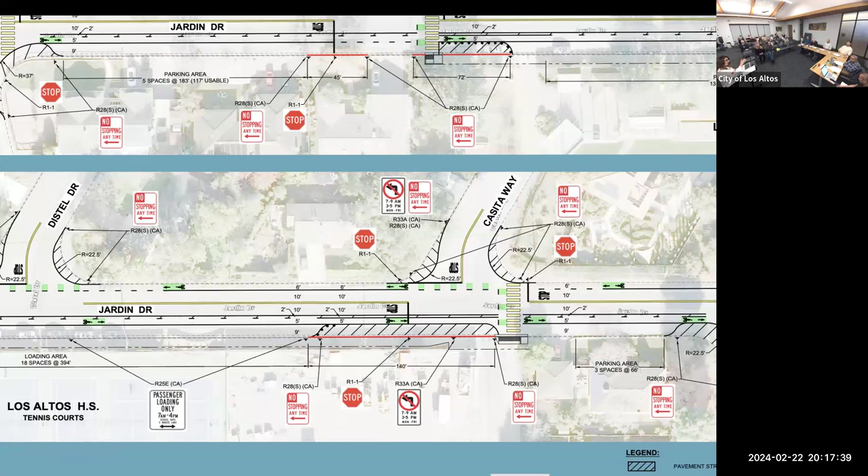The left turn restriction is highly recommended. I think it would really improve any conflict to this point, and if we could, all the streets would even be safer, but that wouldn't be fair. At this location we also saw a lot of people on foot, so we know people are dropping off a little ahead and then trickling in. The inconvenience would be for the parent who cannot make a left turn, but they'll have to find another way to get to the freeway if they're going to work.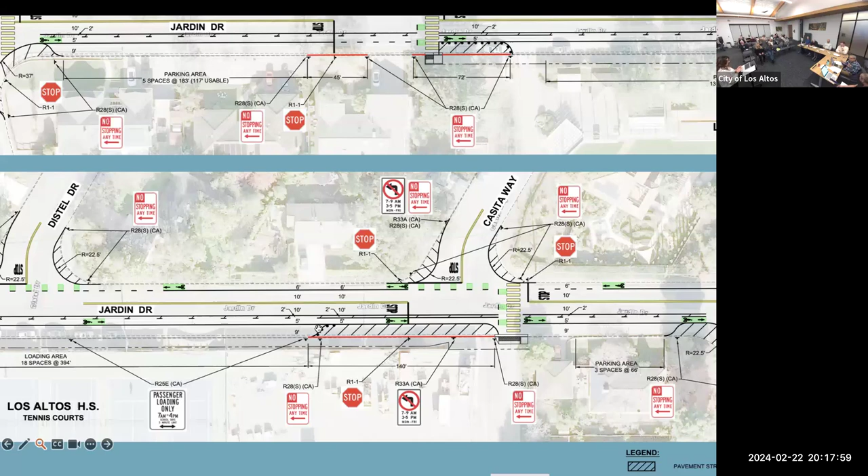In terms of congestion in that corner, do you expect any significant shift in traffic patterns, since the drop-off happens all the way on Casita? I think I heard that most of the drop-off happens there anyway. It seems like it might help congestion, or do you think it could cause traffic on some of the other side streets? We know that Casita and Panchita are the two preferred paths to Los Altos High School, if I could go back to the main slide.

Whether it's Casita or Panchita, those are the preferred routes, but Panchita's volumes were much lower than Casita's. So to answer your question, if people are coming down Casita and can no longer make a left turn, they have Panchita to kind of exit back out of, so it's like making a U-turn.

Do you think there's a possibility that having a crossing guard in that area might alleviate the problem, or have the same effect as not having a left turn there?

Yes, absolutely. If we had help during these two hours consistently, for the most part drivers try not to run over the crossing guards — they take their job so seriously, and it's sweet. They're protecting the kids, and when they're there, vehicles respect the crossing guards. So yes, if we had a crossing guard, the turn restriction could be an option we remove. But there's no guarantee, and we wanted something to help with enforcement and changing behavior. It works pretty effectively on the Almond side.

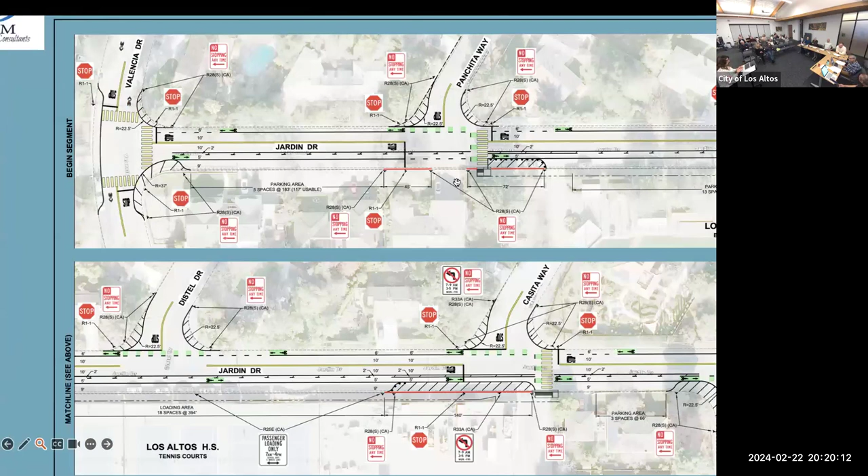I just want clarification on a comment you made about bike ingress and egress, managing bikes or even pedestrians into the school, either on the tennis court side and then back out on the other side. Can you clarify what you were saying and what the intention was there?

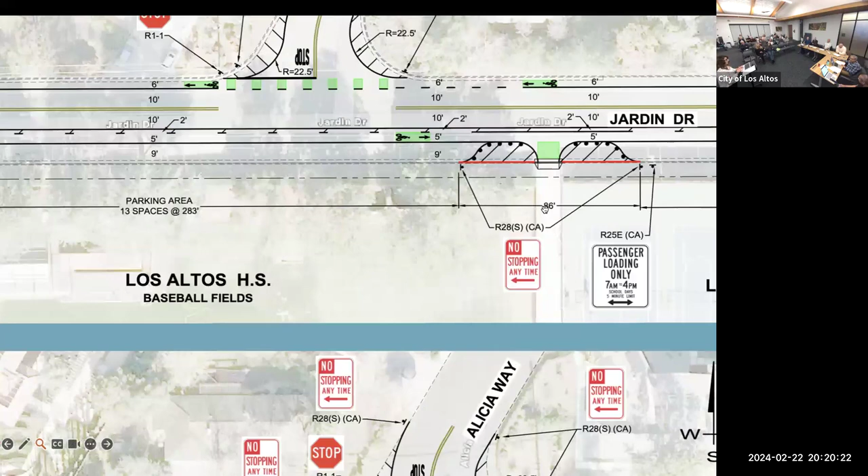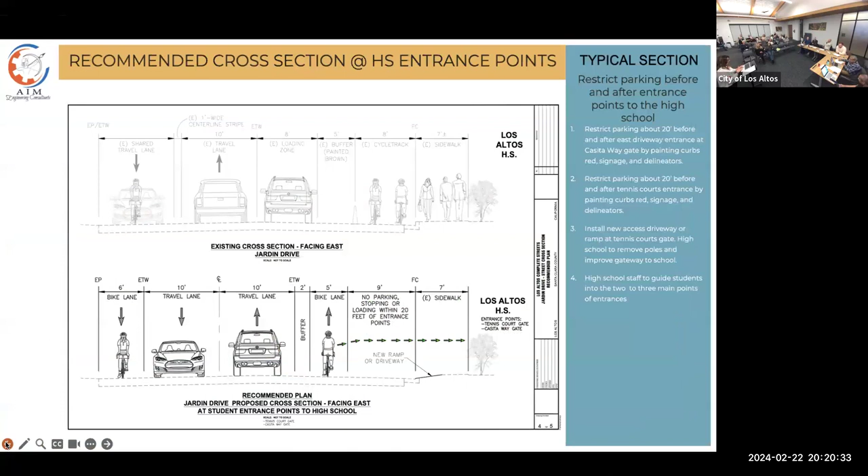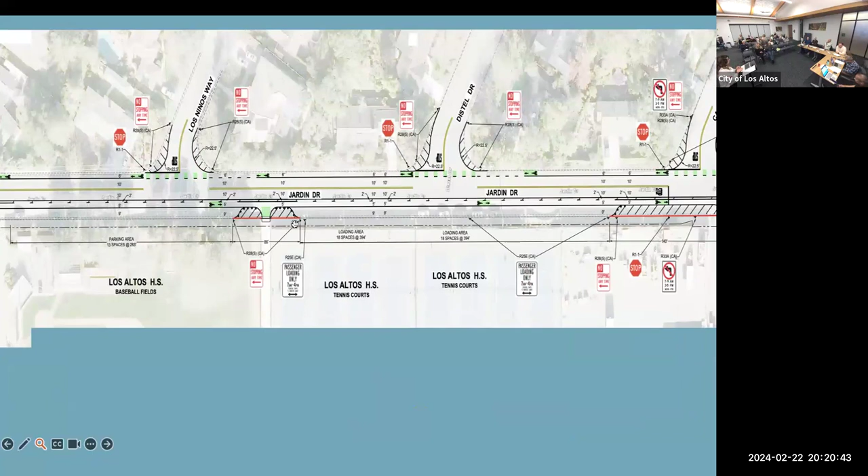Yes, great point. My other slide showing the whole corridor not broken up like this might be better to show — actually that one's even smaller. What I was mentioning was, if the school is supportive of this, is that we got help funneling students, both on foot and bikes, through an improved tennis court gate — better, wider, not as big as the east entrance, but a proper entrance into the high school.

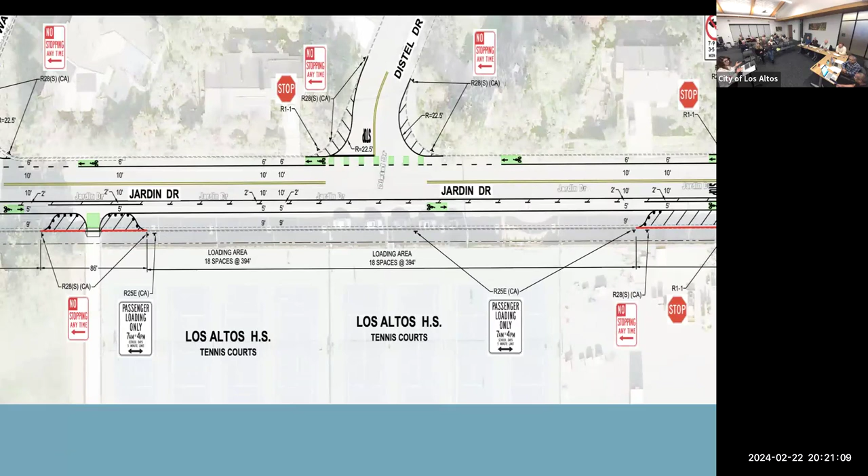Bikes over here during school arrival and departure — arrival would be a lot less, right? So if they're getting caught upstream and someone, let's say a crossing guard or school principal, is standing here making the bicyclists in the morning get onto campus here, well if they're getting here they shouldn't disrespect a grown-up and continue. They're pretty much entering on the tennis court directly, so then this path is kind of empty.

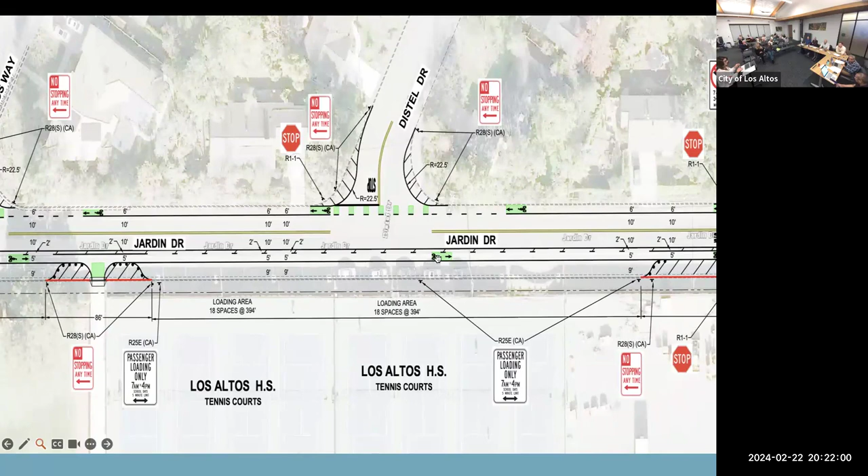Let's assume it's a little bit less, which is why making this a loading zone would result in the least amount of bike conflicts, assuming they got caught upstream by the faculty pushing them onto campus. Although the bike lane is here because after school hours other cyclists exist, making this the loading zone would be a little bit safer because they're not really in conflict with the bikes, assuming they got on campus already. So that's when they're entering and coming to school, they're getting caught right here.

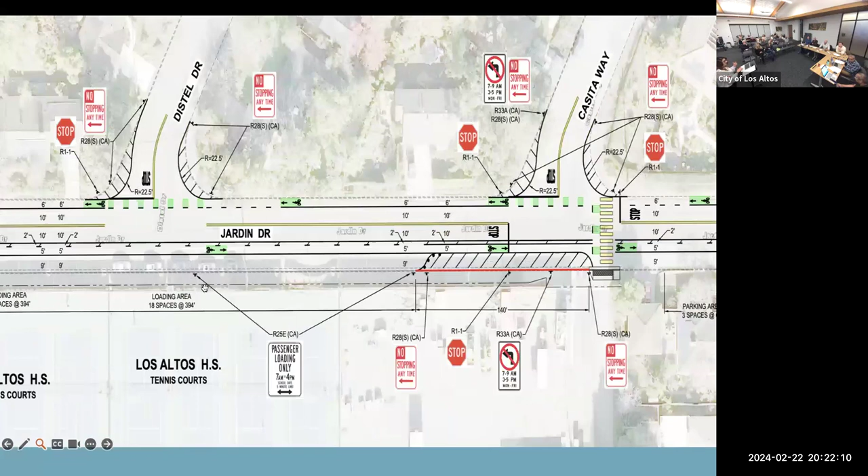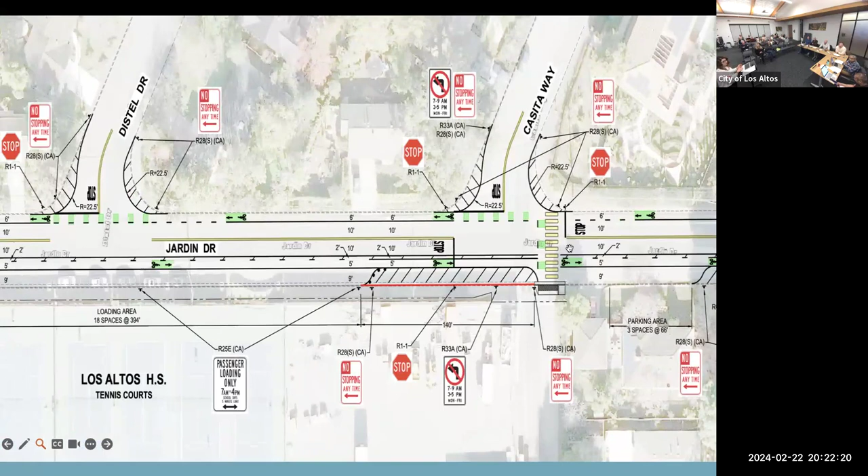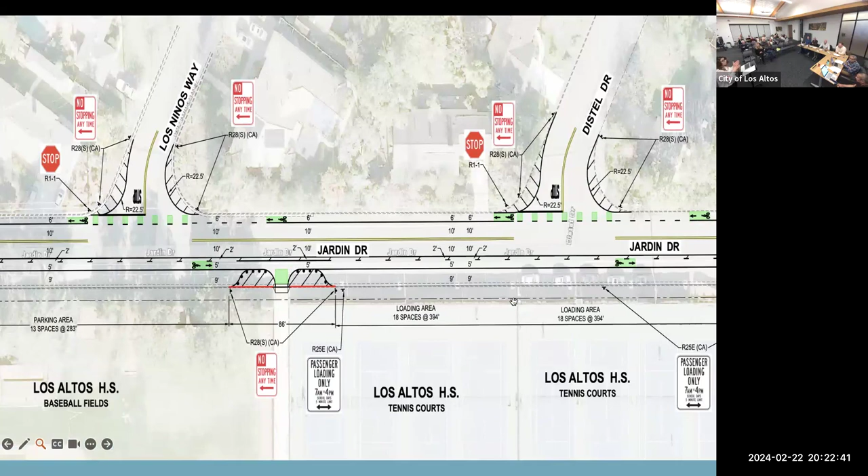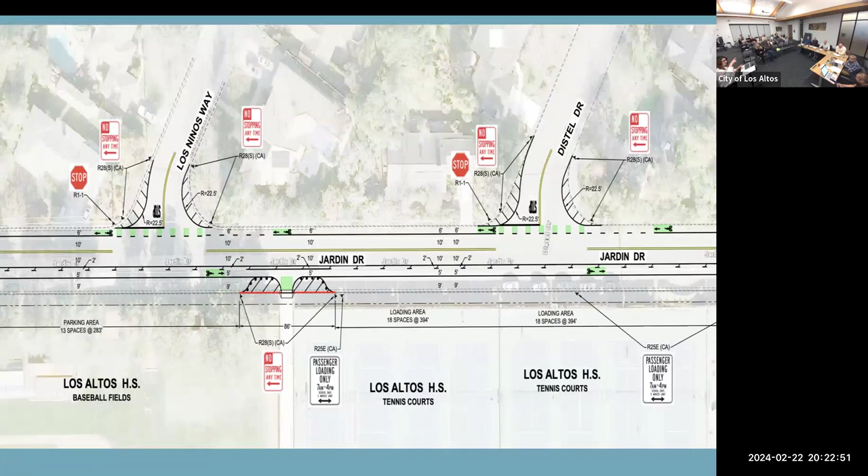Then the reverse happens. We wanted to see if we could work with the school where, when it's time to leave, departures go out of the Casita main entrance. The reason is that here we have a crosswalk, three-way stop, and the bike facility stripe. If they left off the tennis courts, they could only go in one direction, and there's a loading zone for the afternoon, so now we'd be introducing conflict with bikes and cars. Our plan was to get them into the tennis courts in the morning and out through the main entrance in the afternoon, so at least the high school students are operating that way and safer.

Otherwise, the rest of the day it's just your typical bike lane. Did that answer the question? Yes. Okay, I think that's all the questions I had.

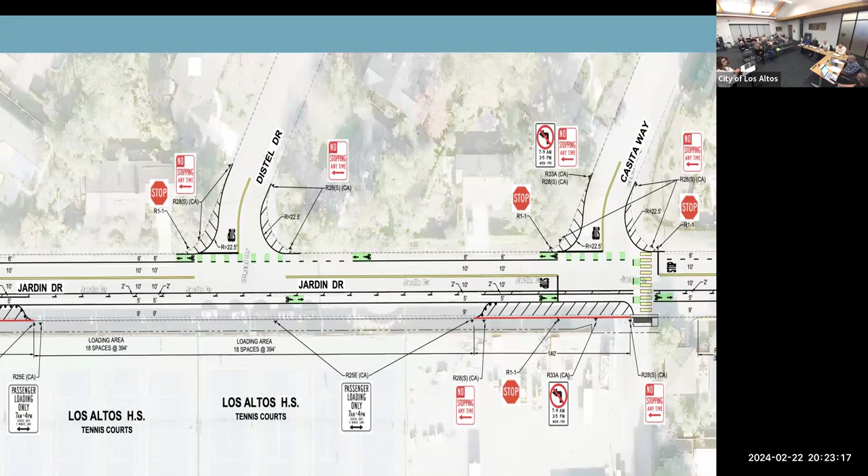I just wanted to give the opportunity for the vice principal to see if he wants to make any comment. I know he wanted to comment earlier about things, but I think with respect to this one, there was a question about the gates, managing the gates, so if he wants to make a comment.

What we would do with the gates is try to do something similar to what we did with Almond, and try to move the bike and pedestrian traffic away from the loading and unloading zone so that we don't have conflicts of cars with bikes in that area and make it safer. So that's kind of the main thing for that.

Is the proposal then to maybe shut off the gate during after school? I don't know, we haven't thought about that, but yeah, we could. I'm thinking about allowing the students to bike through there and then bike over to the east driveway, because there's an east-west access on the other side of the field that's fairly wide, which would allow bikes to traverse that way and make it more popular coming in and going through there. Then if bikes are parked on the east driveway, they'll just naturally go out to Casita.

Okay, great, thank you. I have one question for staff, just as a follow-up. There's just a bunch of different things proposed, in terms of even the logistics, like the left turn in the loading zone.